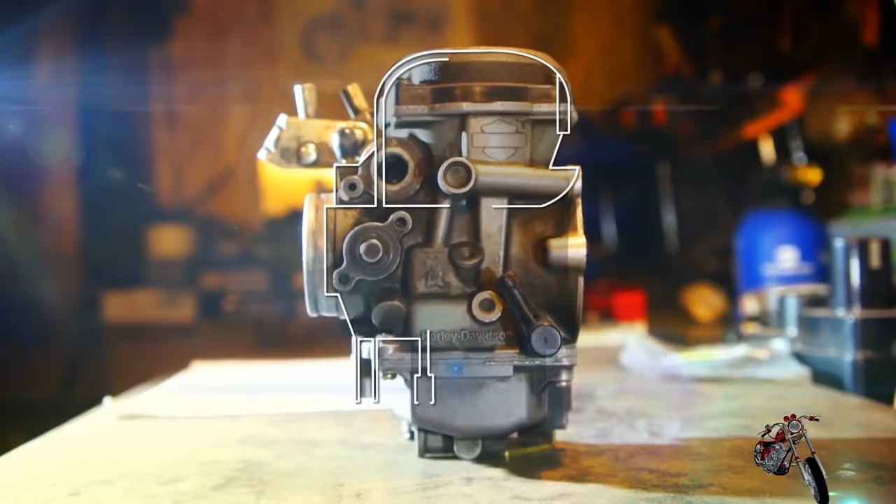In the lower part of the carburetor, we have the float bowl, always topped off with gasoline thanks to the action of the float and the fuel valve. As the fuel level drops, the float opens the valve to raise it back up.

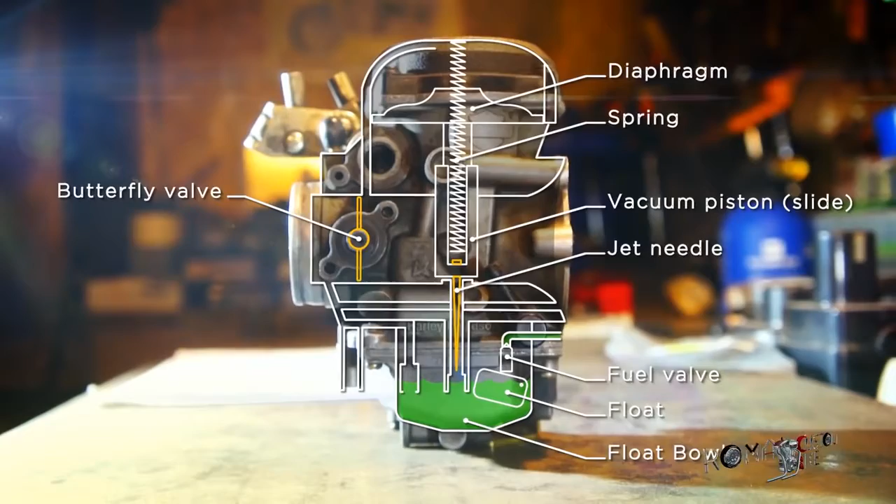In the upper part of the carburetor, we have the jet needle, the vacuum piston or slide, and the diaphragm. The whole assembly is kept in place by a spring. Then we have the butterfly, controlled directly by the throttle cable. And finally, we have the pilot jet and the main jet, both feeding the two fuel circuits inside the carburetor. Last but not least, the fuel mixture adjustment screw.

Now, how does it work? In idle condition, the fuel is sucked out of the float bowl through the pilot jet and is mixed in with the air before going into the cylinder. The whole process is powered by the low-pressure vacuum that the piston creates inside the cylinder.

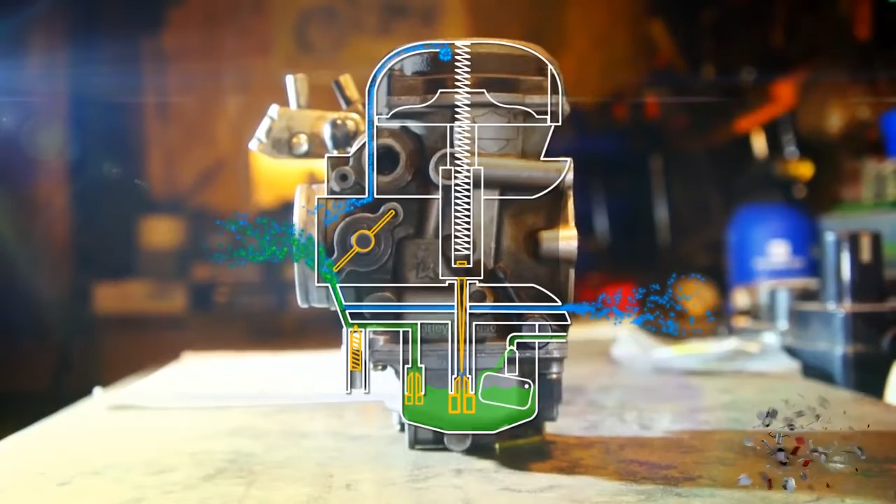When we twist the throttle, we directly affect the butterfly valve that opens up. Now the low pressure is also starting to affect the top vacuum chamber. The diaphragm is suctioned up and with it, the slide and the jet needle are raised. As the jet needle is raised, its tapered shape allows for more and more fuel to be suctioned through the main jet. By the same token, as the slide opens, more air is let through the carburetor, proportionally to the quantity of fuel.

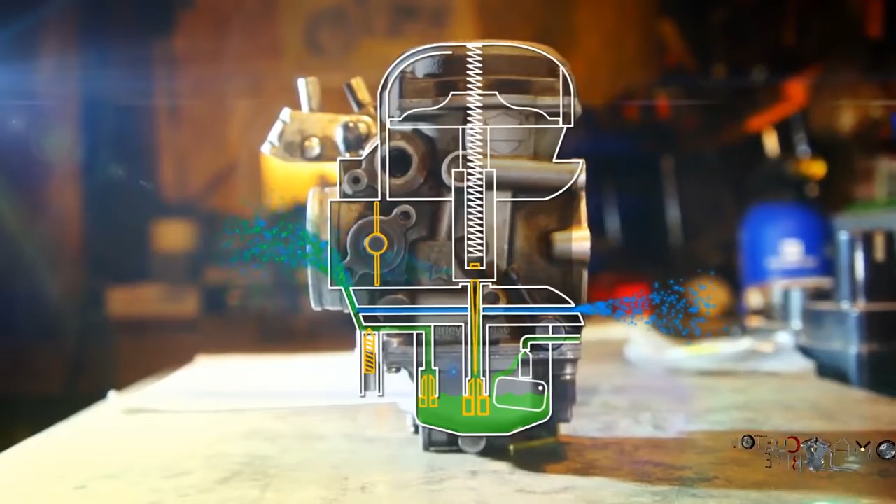Since we're at it, let's see what happens when we pull the choke knob. It opens an additional stream of fuel straight into the cylinder, enriching the mix for an easy start with a cold engine. But let's get back to the idle circuit so we can take a closer look at the mixture screw and how it works.

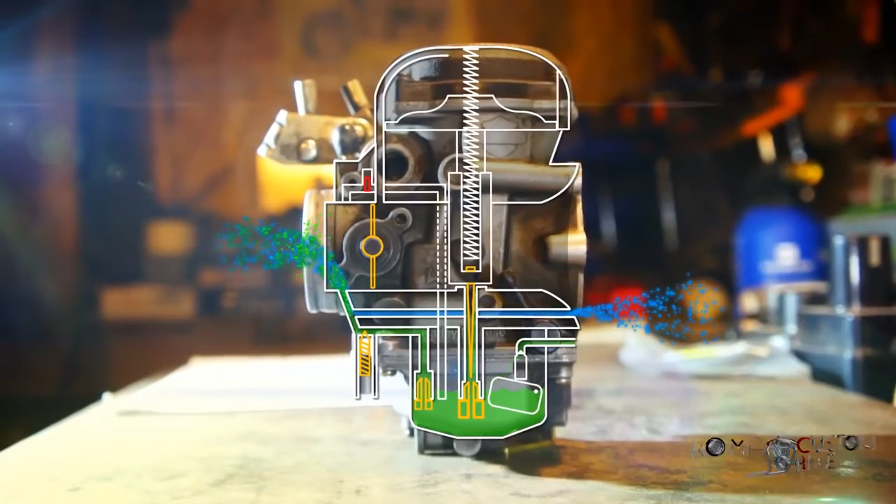By turning the screw, we open and close the fuel passage, therefore adjusting the ratio of fuel to air in the idle circuit. When we twist the throttle, the main jet doesn't start to deliver fuel right away. For a small amount of time, the idle jet is still the only source of fuel to the engine, which is why setting the mixture too lean or too rich will directly affect the responsiveness of the engine.